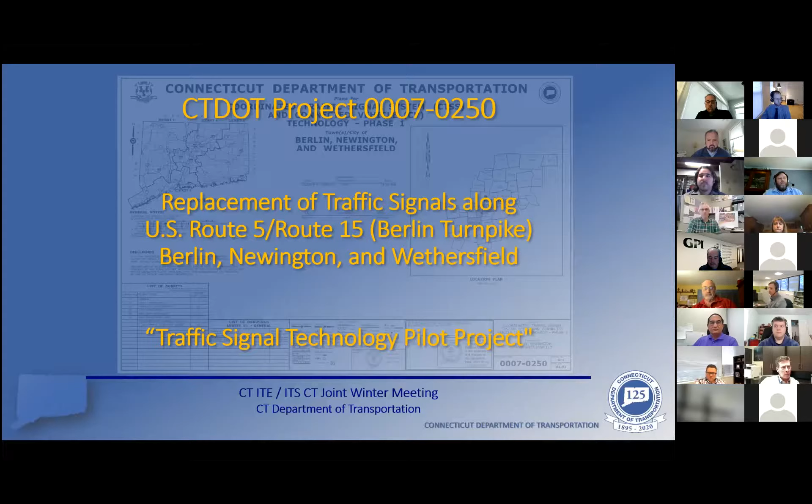Thanks, Mark. Again, my name is Matt Bloom. Today we're talking about Connecticut DOT Project 7250, which is really a traffic signal technology pilot project. As an outline of the meeting, we're going to start with a quick overview, talk about the proposed improvements that are going to be implemented as part of this project, get into a little bit of the technologies that we're looking at, as well as some of the decision process that we had to go through to figure out what we wanted to implement along this corridor, and then take questions and answers.

The project team included Mark Carlino and Mark Macu, who really led this project. Myself and Jay Lockaby, who worked on the project. Janet Kaiser from Gannett Fleming was the consultant that designed this project. And there are two people that aren't pictured but really deserve some recognition. That's Lisa Conroy, who really oversaw a lot of the design elements, and John Cordy, who oversaw a lot of the ITS components.

So the project, like Mark had mentioned a second ago, involves 15 signalized intersections along the Berlin Turnpike, starting at Nott Street and continuing south to Rowley, Selden. This is the first of two phases. The second phase is the next 13 intersections to the south towards Meriden.

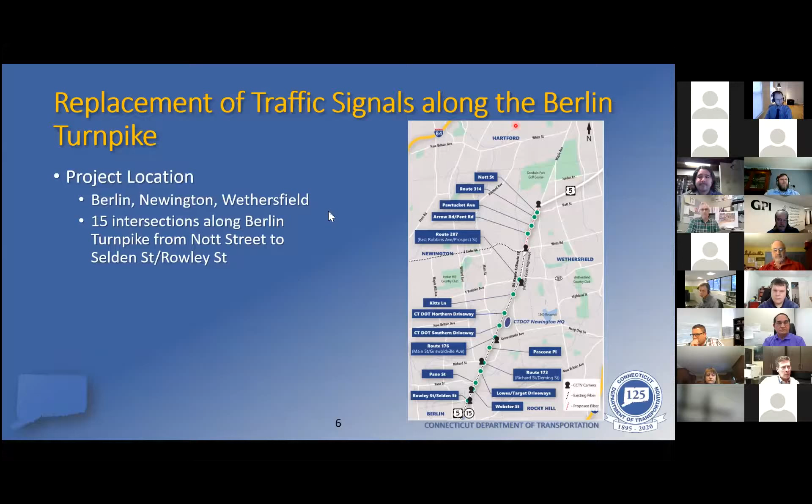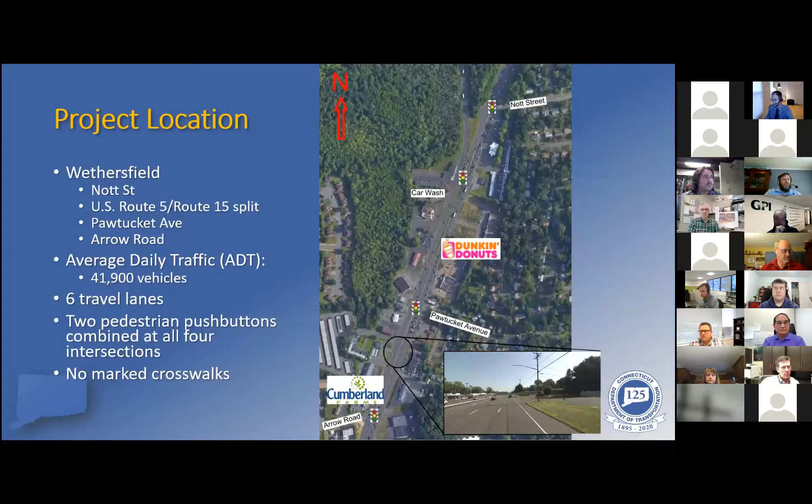As I'm sure everybody on this call is familiar, the Berlin Turnpike is a heavily used commercial corridor, ranging from 4 to 6 lanes. There's about 30 to 45,000 ADT along the corridor. And something that causes a significant impact to this corridor is that it's used as a bypass whenever there's an incident on I-91. And the availability of navigation systems with rerouting capability is really compounding the congestion that we see associated with incidents on 91.

As far as existing conditions are concerned, the corridor has aging signals and technologies. Some approaches on this corridor still have 8-inch heads. The corridors run with Naztec TS2 controllers. It's a Naztec system with copper communications. Pedestrians are accommodated with side street green.

And there are actually 2 separate systems along these 15 intersections. There is one with 8 patterns to the north, one with 6 patterns that's to the south, and there's 2 incident management patterns. One is for I-91 incidents, and the other one is for snowplow issues during the winter.

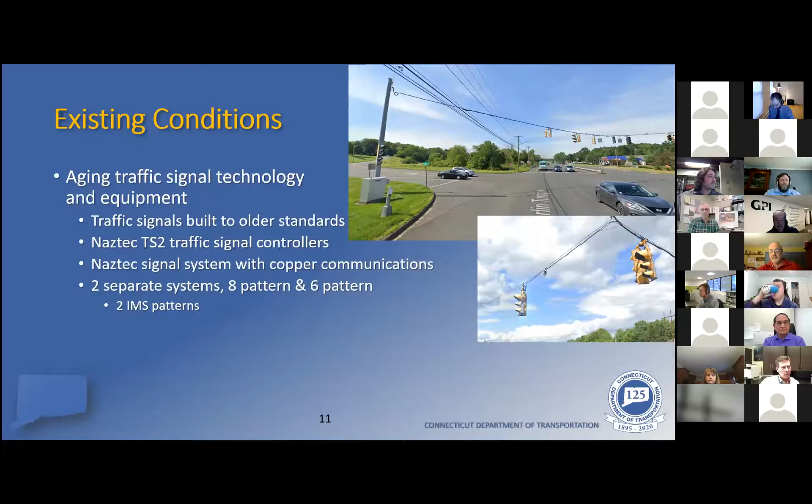Some of the limitations that we have, we really have limited flexibility in programming of signal timing. Timing really can't be easily adjusted to manage increases in traffic due to an incident, such as on I-91. I did mention earlier that there's a timing plan specifically for I-91 incidents, but it really doesn't account for diverted traffic volumes, duration, time of day, or several other variables.

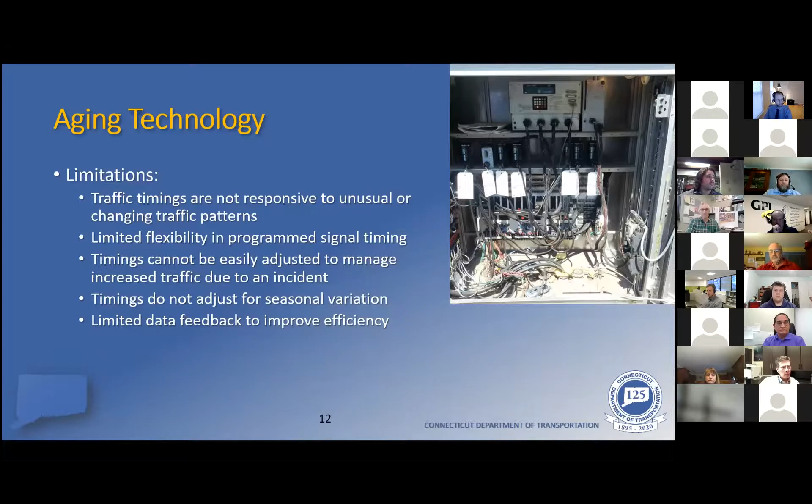Timings don't adjust to accommodate the seasonal ebbs and flows that are found on this corridor. And we have very limited data feedback, which would help engineers improve efficiency.

Something I wanted to mention while we're just talking about aging technology, and I really just threw this slide in to reinforce the fact that the department's moving away from in-pavement detection technologies, primarily because it relies on the pavement condition to function. It could be damaged by changes in weather, utility work, and maintaining loops is a challenge and costly, and it actually requires personnel to work out in the road, which we don't really prefer.

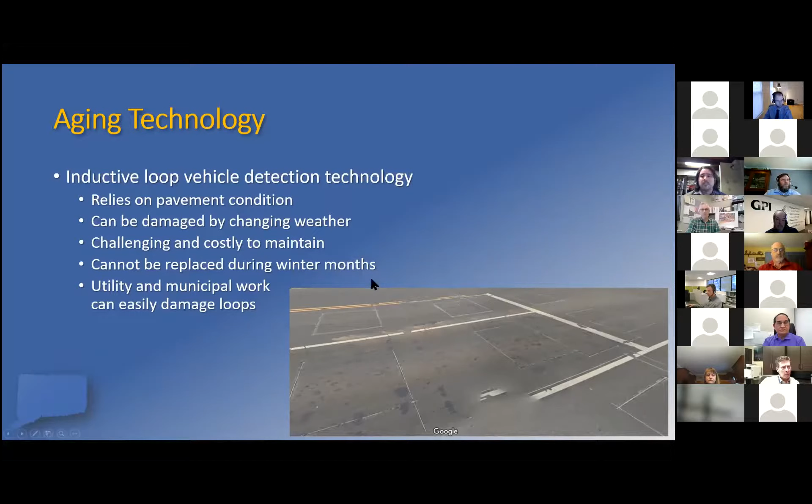So before we get into what specifically we're proposing, let's just talk quickly about what our objectives were. First and foremost, we're looking to maintain our traffic signal assets in a state of good repair. We also want to improve vehicle, transit, and pedestrian mobility. We want to increase efficiency and reduce emissions. We want to improve safety and reliability always. We want to implement technology to manage traffic flows. And we want to provide tools to help engineers to optimize the traffic flow along the corridor.

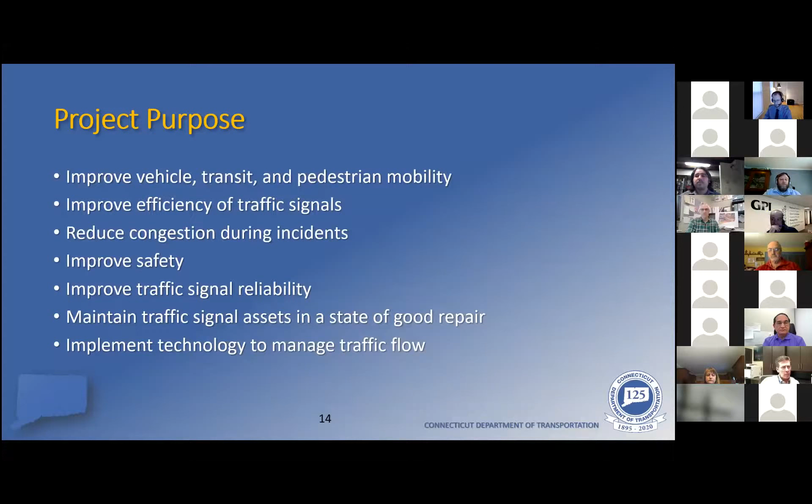So we came up with a scope of work. And that includes, I guess, starting with some physical features. The corridor is going to implement mast arms. Mast arms are the department's preferred structure type. It allows a much greater flexibility in mounting cameras and other technologies than you'd get with a span wire.

Because it's such a wide corridor, very long mast arms are going to be implemented as part of this project, up to 80 feet in length. They've been designed in-house, and we've done that to expedite the materials acquisition process, and potentially as a new path forward for state signals. We're going to be removing side street green pedestrian accommodations. We'll be providing LPI phasing for peds and ADA accommodations to cross Route 15.

We're updating the detection. We'll be including CCTV that'll be wired into the operations center for operators and engineers to remotely observe operations along the corridor. We'll be implementing automated traffic signal performance measures, which is part of FHWA's Every Day Counts. It's EDC 4. We'll be including adaptive traffic signal control, which is part of FHWA Every Day Counts EDC 1.

And we'll also be including connected vehicle technology, which is part of the National Operations Center of Excellence Signal Phasing and Timing SPaT Challenge. This will be the first Connecticut DOT corridor to implement vehicle to infrastructure communications. And there are huge future safety benefits with this vehicle to infrastructure communications, with some potential applications being able to warn drivers when their speed and the signal timing indicates that they may run a red light.

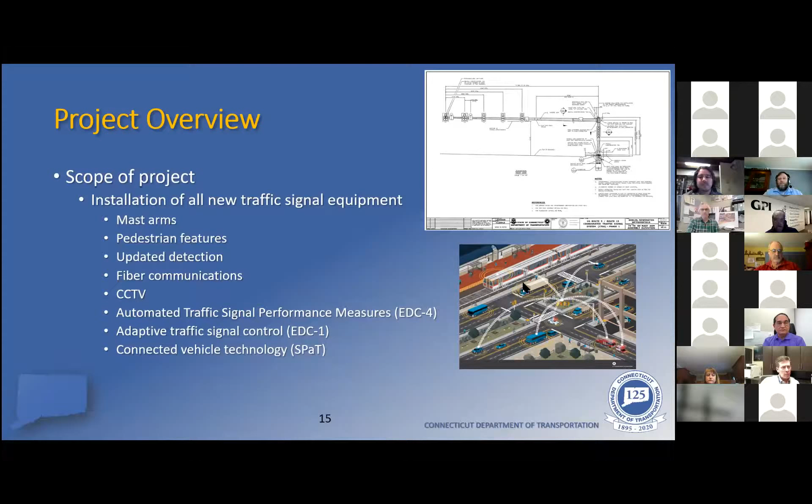All right. Thanks, Matt. Can you hear me? Yeah, I think so. Sounds like it. Anyway, if you go back one slide.

Yeah. So before we really started getting into the full design of this project, we went through the systems engineering process. I'm sure some of you, as this is the ITS CT joint as well, know this diagram, the V diagram for ITS and any complex engineering process. It begins on the left-hand side, but everything on the left-hand side also has a corresponding integration and recomposition on the right-hand side that it kind of combines with when you're finishing up the design and

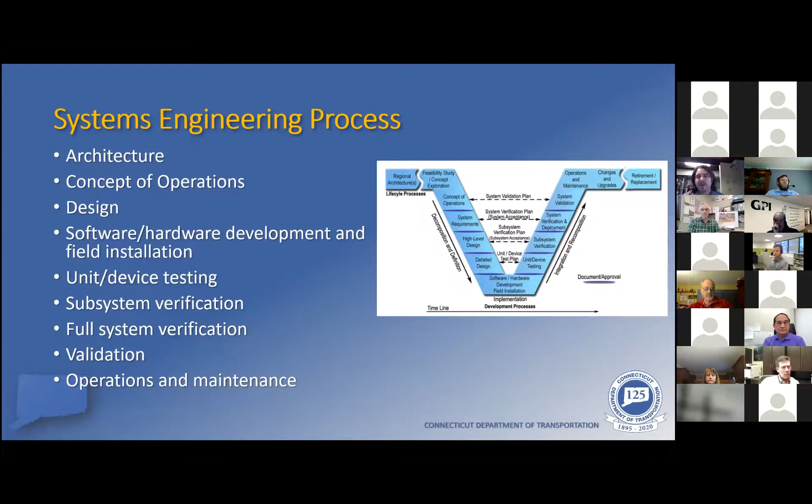integration and validation. In the beginning of the systems engineering process, we looked at the existing ITS architecture in Connecticut. As you'll see later, we made some changes to the regional architecture. You go through concept of operations, design, you evaluate what type of technology best fits your specific project needs. And then as you go down through the V diagram, you actually get to install it in the field, go through testing, verify the subsystems before you can actually validate the whole system and determine responsibilities for operation and maintenance. Slide.

So yeah, the first step of the V diagram is to look at the existing ITS architecture. The state of Connecticut developed our statewide ITS architecture in 2018. And that was based on ARC-IT 8.1, which is basically federal ITS architecture guides to build your own specific regional ITS architecture. But a couple of things were left out that are specific to this project. And when we went through the systems engineering process, we had to develop these types of diagrams so that when we implement it, we have a plan of action.

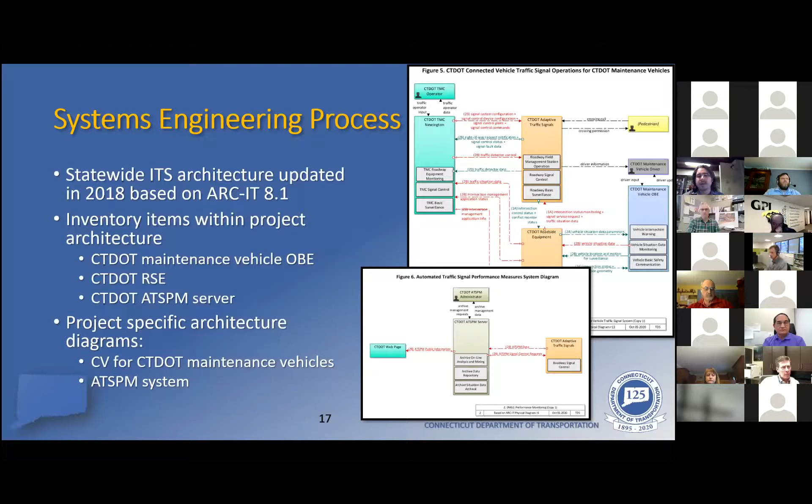Some of these include our connected vehicle technology, so the onboard equipment for our maintenance fleet, as well as the roadside units that would actually be projecting out the connected vehicle technology messages. And then also we developed a diagram to plan out our ATSPM server and management of the web page as well as the integration to our central software. And yeah, so those were developed to show how everything is connected with our connected vehicle technology and testing it out with our fleet vehicles. Slide.

Through the V diagram process and systems engineering, we evaluated a variety of different types of technology. We looked at all the different types of signal controllers that would best fit our needs for our project. We looked at several different adaptive signal control systems. We looked at several different types of software that we could potentially use for our ATSPM, as well as our connected vehicle technology.

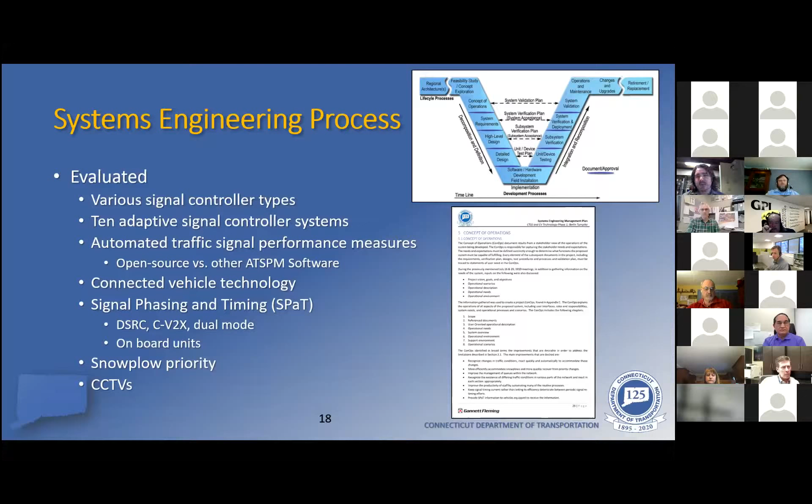And then, as some of you probably know too, with the SPaT, originally the SPaT challenge was to try to get more local and state agencies to build this type of signal phasing and timing messaging out in more projects to make it more available. And the FCC has gone back and forth on their feelings about DSRC as well as C-V2X. So that was a lot of discussion when we were going through the systems engineering and the SEMP that we ended up developing. And we also looked at snowplow priority and CCTVs, but that wasn't as much of a discussion as some of the other types of technologies. Slide.

Yeah. So obviously we involved all types of stakeholders, including our own ITE, all the local towns. We had a lot of help from our consultant engineers to reach across the country and get different types of advice from other agencies that have deployed this type of technology. And we used all of this information, all the left side of the V diagram, to come up with our final plans, which we are finishing up currently.

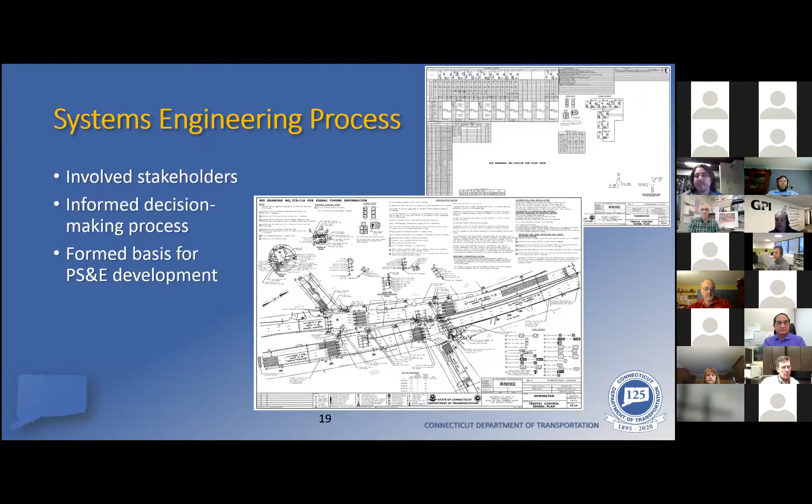So some of the basic stuff that we do with any traffic signal replacement now: updating our pedestrian features, providing signal heads for all pedestrians, getting rid of our outdated side street green pedestrian phasing that's not very intuitive for pedestrians. We are making a couple of median openings on the Berlin Turnpike for pedestrian crossings. I think almost all intersections will have crossings to cross the Berlin Turnpike.

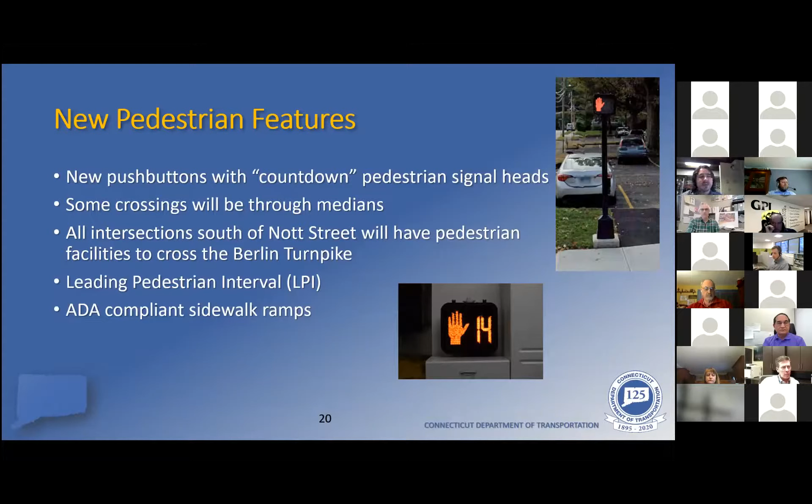And in order to help with the new pedestrian activity that we're hoping to induce with these types of features, we're looking at putting LPIs on all of our pedestrian crossings, letting the pedestrian get out into the street so that vehicles can see them before the vehicles get the green light. And obviously ADA compliant sidewalk ramps. But due to the limited scope of just traffic signals, we weren't able to include a lot of sidewalk infrastructure along the turnpike.

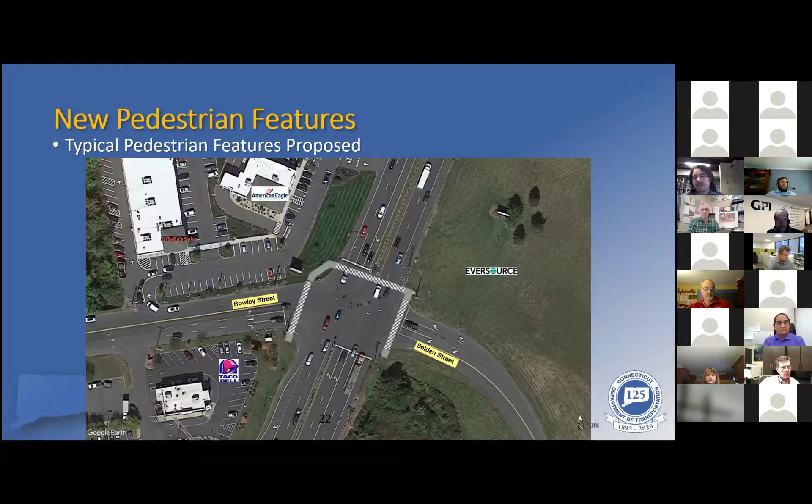As Matt discussed earlier, we are not only trying to get rid of old loop technology on the turnpike, but across all of our signals across the state. So in this project specifically, we're using GridSmart cameras for the stop bar detection, and we are using Wavetronix radar detection for advanced detection.

Again, these technologies were part of our systems engineering process. The Wavetronix radar technology we found was appropriate for this project. And as we know, we don't have to go out there and close a lane of traffic for loops. We can just go out there and put a new camera out there if something fails.

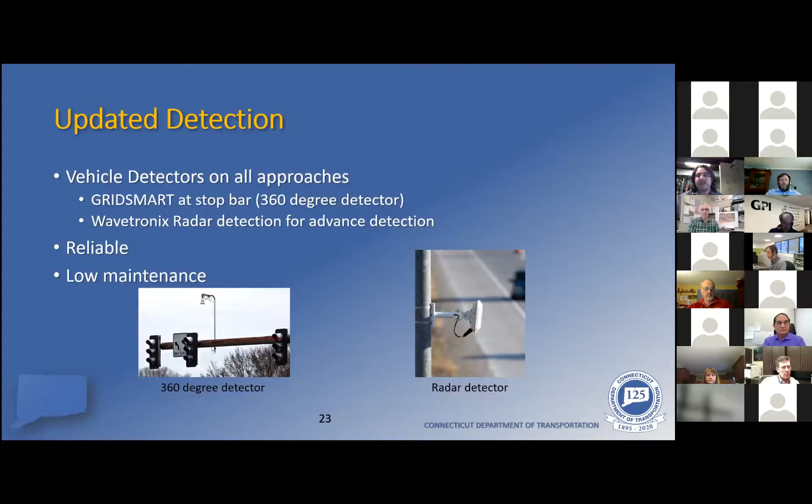So adaptive traffic control technologies. One of the larger parts of technology that we're going to be piloting on this project. The idea is that the adaptive control will automatically learn and adapt using advanced computer algorithms to adjust the green times and offsets and cycle lengths in real time without us needing to change it manually.

And the Berlin Turnpike was a good route for this because there are a lot of incidents throughout the Hartford area, and people are diverted to the Berlin Turnpike quite a bit. So the adaptive control will automatically adjust to this much faster than we would be able to manually change all the green times and offsets.

It seems like this would be kind of an automatic thing where you just turn on the switch and it figures out all the times and everything's great. However, there's still a lot of implementation and engineering that needs to occur once you put it out in the field.

Again, to go back to our V diagram, there's an extensive right side where you verify at a subsystem level, then the whole system, and then finally, still maintain it at the end. So there's still a lot of input that you need once you install it. But the idea is to reduce travel times and reduce emissions.

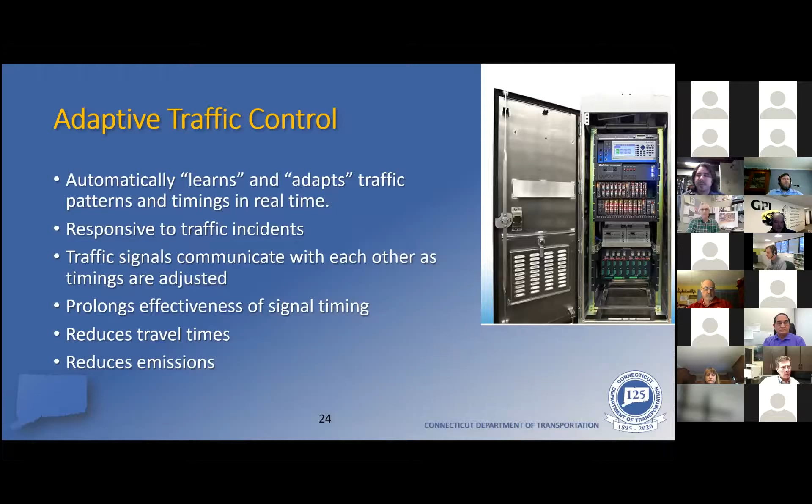So with the adaptive control, we are putting out ATC controllers, and we've also decided on SynchroGreen as our software for the adaptive traffic control technologies. When we were looking at different types of vendors and software, we were pleased because SynchroGreen was compatible with our existing system. We already use, not necessarily SynchroGreen, but the same manufacturer to manage our IMS systems and our CCTV cameras. So that was obviously a plus.

And also it will be integrated with our existing preferred, at this time, traffic simulation software. So Synchro will allow you to simulate what SynchroGreen software would actually do out in the field, which was a plus since we're already using that.

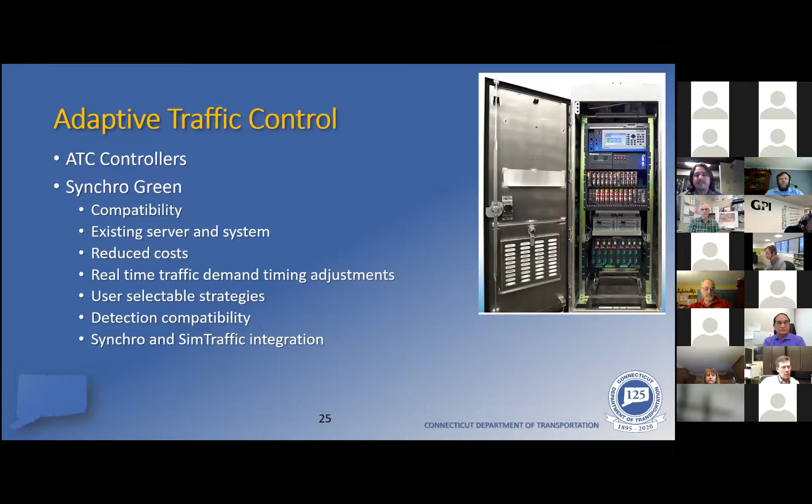Connected vehicle technology. As I said before, this was pushed by the federal government as part of the SPaT challenge, or the signal phasing and timing, and AASHTO. So the idea was trying to encourage all types of agencies to get this type of technology out there, encourage car manufacturers to also use software, see that it's being used, see that it's being installed.

And the idea is that the technology will broadcast messages based on the signal phasing and timing to the cars that go by. It can broadcast information such as pedestrian phase activation. So if somebody's pushed the push button, it can send out a message to the cars that the push button's been activated. It can alert vehicles that the preemption's been triggered and that there might be an emergency vehicle in the area. And then also we are looking at it for signal priority and snowplow priority on our maintenance fleet vehicles.

And like I also said before, the FCC, which is a separate entity from our own transportation industry, is trying to make some of the frequency ranges that are available to DSRC shrink for our own connected vehicle technology and make them more available to other uses. So it has been kind of a back and forth on whether to use DSRC or C-V2X.

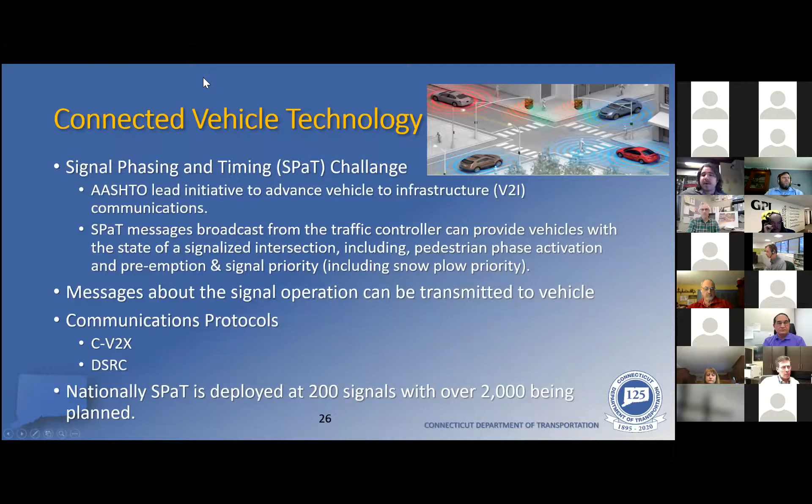So as part of evaluating that technology, we're going with dual-use roadside units so we can use either type of communication. And we will be adding to the number of nationally deployed SPaT challenge traffic signals.

ATSPMs. So what ATSPMs are, just briefly, is the collection of high resolution data from all the detectors at a traffic signal. The idea is to take all of these actuations of when a detector was activated, compile it, bring it back to our central system, and then deploy software that'll actually take into account all these detection activations, and we will be able to run our own reports on how all the signals are operating. We'll have this for the Berlin Turnpike project, but we're also hoping to expand this to other signals.

So you can get information based on, like I said, the detection actuations. And then from that, you can pull up how well the coordination is happening across signals. You can see if a lot of people are running red lights. You can see how often the pedestrian push button has been pushed. There are a lot of great benefits that can come from this, including proactive maintenance. So if you see a push button being activated 300 times from 3 a.m. to 5 a.m. in the morning, obviously the push button is broken, and you can go out, fix it, and nobody will even know the difference.

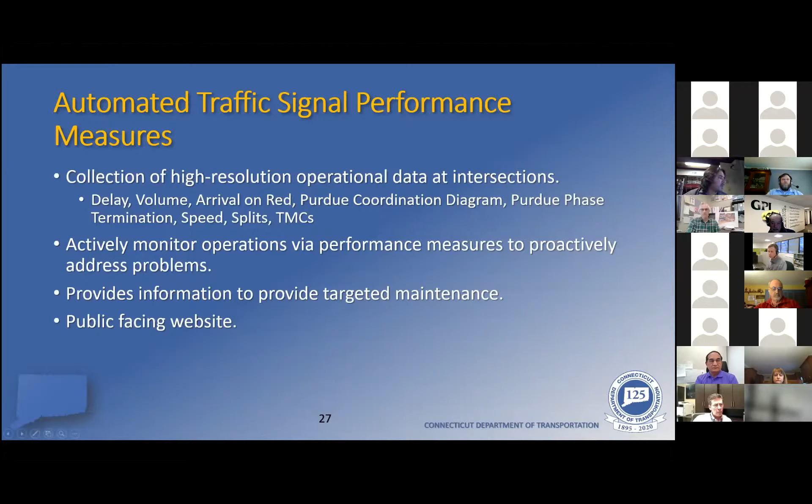And this website will be available to the public once it is. Thank you. Yes. So this is an example of the website for ATSPM. So this will be available internally DOT, but also for all the signals that we've connected to. Several other states have already run this public facing website. So this is Georgia DOT's website. Utah DOT has a website. There are several other agencies that have these type of ATSPM software websites, and this is free software, which is always a plus for public agencies. And from this, anybody can get the same type of traffic signal performance measures.